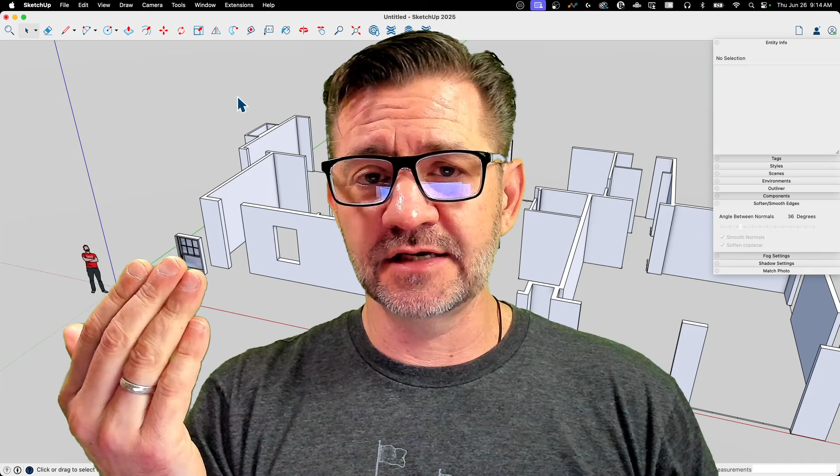So we did a couple of videos talking about taking line work and importing it, making the faces, and then different ways you can take those faces and make them into 3D shapes, 3D walls. And then the next step generally is going in and adding doors and windows. We're not going to focus so much on creating the door and window component. I'm going to work with the pre-made component for a window, and doors, well, we'll talk about doors too. Doors are kind of like windows that go all the way to the floor.

But I do want to talk about different ways to put those openings in and how you could go about them. A lot of it comes down to how you created the walls. So we'll talk about that, and then we'll look at different ways to get those in there. So let's hop in.

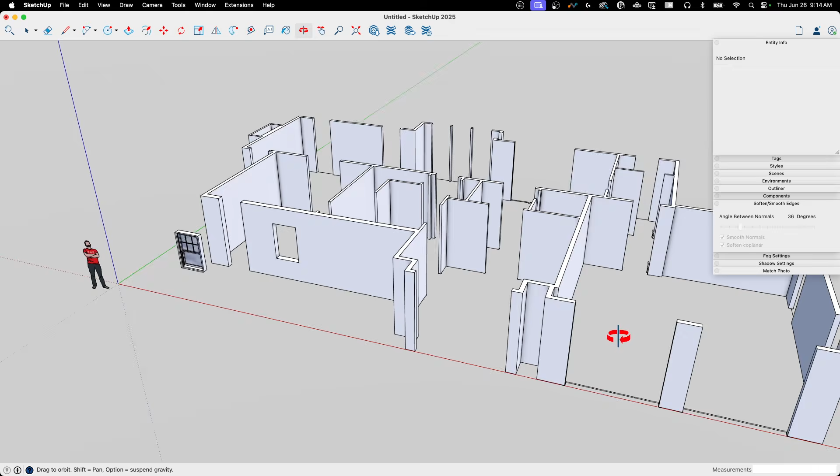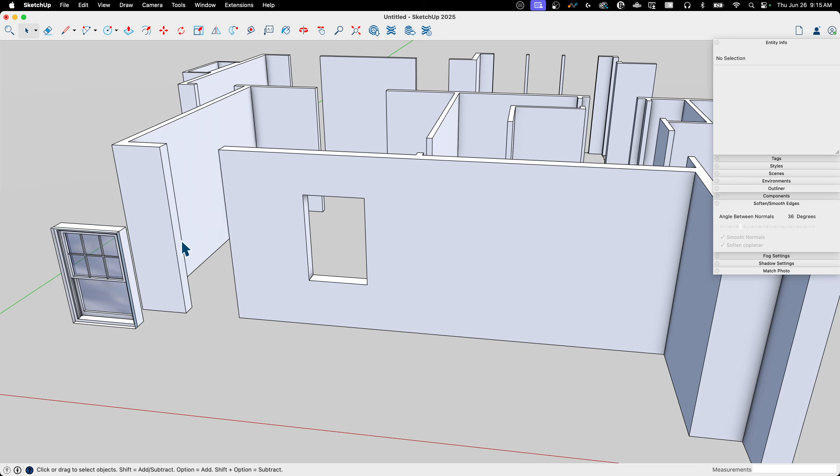All right. So I'm working off of this same house that I started on back in the very beginning of this series. And here I basically want to put this same window in this wall 3 times. Once here, once here, once here. These are the 3 different ways your walls may end up as you're working through your input. This is probably the most common. If you're drawing your walls and pulling up to 3D like we showed in the previous videos, you'll probably end up with a gap like this. If you're pulling along, you'll probably end up with a gap like this.

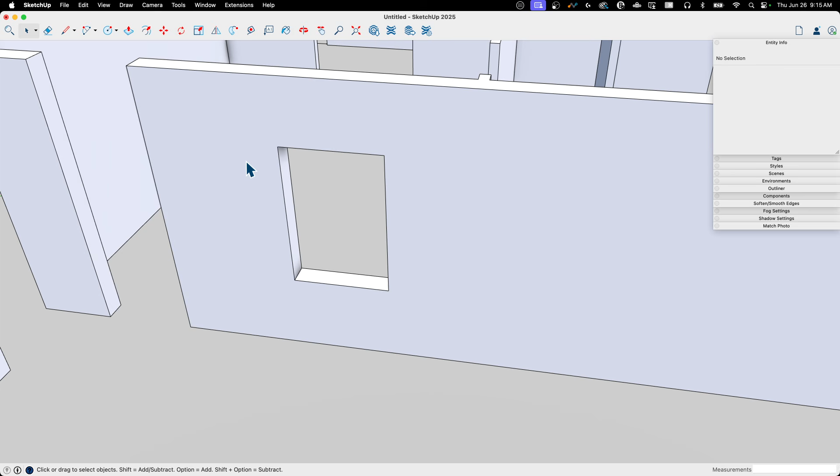There's a possibility that as you're drawing in your walls, you take the extra steps to break actual openings in. So you could have this at this point, which is kind of like, okay, you're done. But we'll talk about how to handle this. And the other option, again depending on how you're doing your input, you may just pull your wall all the way across an opening, which means you end up with something like this, and then have to go in and create that opening. So what do you do in that case? Let's take a look at these different situations.

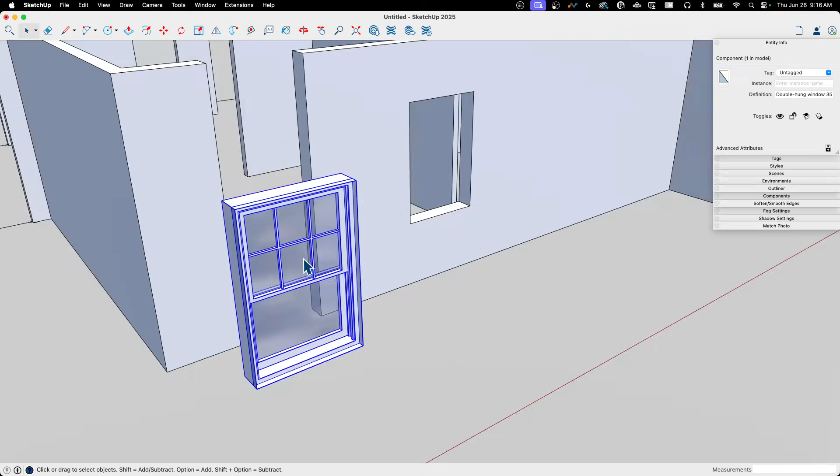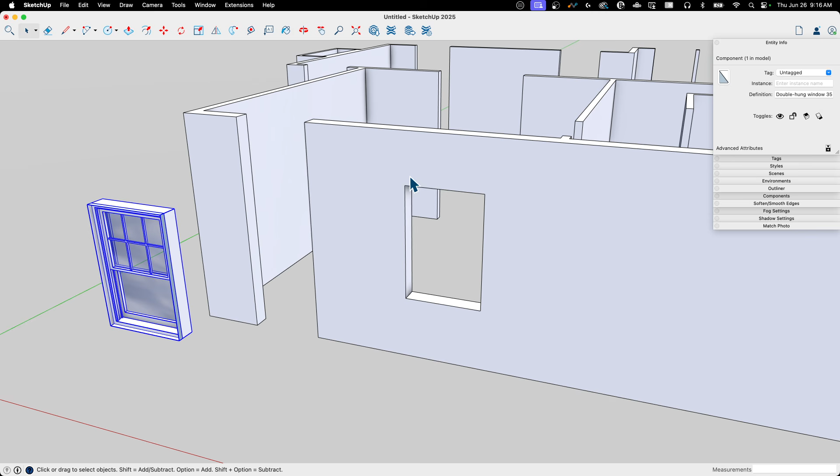Like I said, I'm just going to work with this window right here. So I have a component. I'm going to put this same exact component in multiple times. So just to jump to number 2, if as I'm inputting my walls, I actually put a face down, extrude it up to the sill plate height, put an opening, and fill the wall in up here where the header's going to go, then I'm fairly well done.

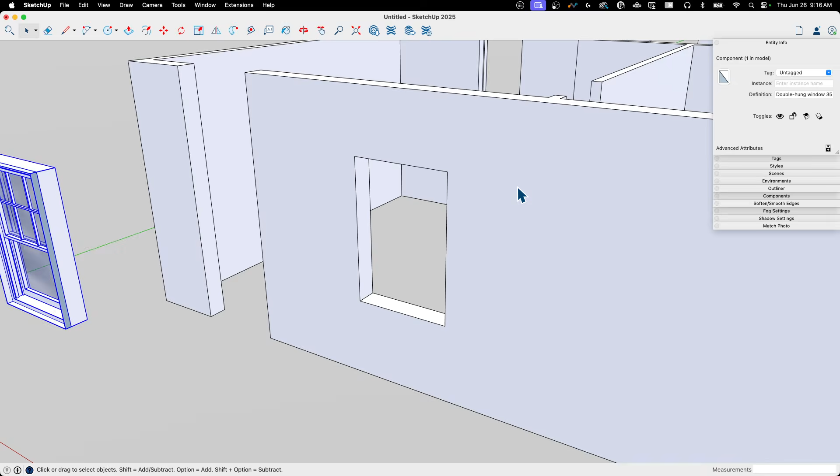The thing to remember, regardless of what method we use here, is what is the actual opening height that I'm considering. And I point this out for a couple of reasons. This is very similar to what I talked about when we talked about how you're going to draw the walls. The opening size you actually use is going to change depending on what you're using the model for. Just like anything else in SketchUp, this is a purpose-built model.

Meaning, is this opening going to be the exact size of the opening that's called out on your plan? Is it going to be based on the actual size of the component? Am I going to have additional opening size there, considering this is the hole in the framing versus finish? All of that is something you need to consider as you model. I can't tell you exactly what size opening you need to put in for a 3040 window. That is something you need to know.

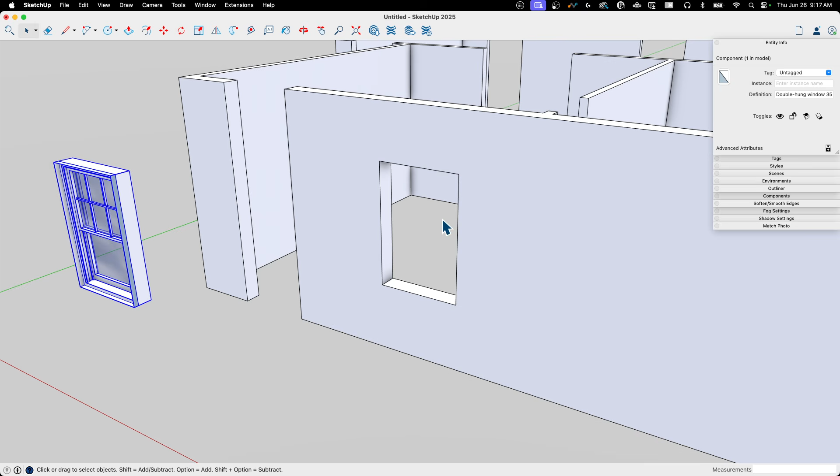In this case, I'm going to make my opening exactly the size of this window right here. So let's check it out. This is 3 foot by 4'6". And if I grab this window right here, it's going to plop right in there. And there we go. I'm done.

I'm good. You'll notice right now I am working off raw geometry. That is intentional, just so I don't have to hop in and out of stuff. Like I said in the other videos, I would of course keep this all grouped as I go. I'm just doing it loose because it's going to speed up this process. So if as I was modeling, I took that into consideration and left the proper opening size, then I can just come along, drop my components into those holes and be done.

The most common thing is this right here. This is where I have just a break in the wall. The wall stops, a door or window shows up here, and then the wall picks up on the other side.

Again, make sure that this width is the width you want. So we're looking for a 3 foot by 4'6" opening. This is 3 feet gap. That's perfect. Now I just have to put my 4'6" in.

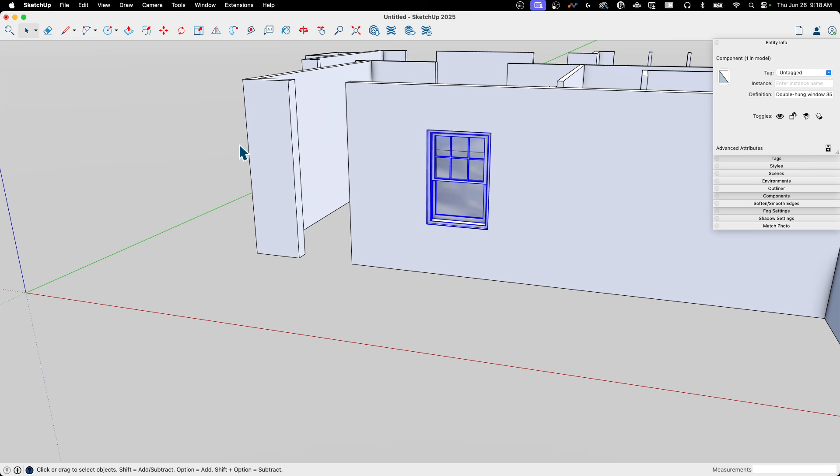Generally speaking, when you go to put in a series of doors, windows, whatever, a lot of them will have very similar measurements. They might be different widths as I work across, but on the front of a building, I'm probably going to have a consistent header height. Same with interiors. Probably most of my doors on the inside have the same header height.

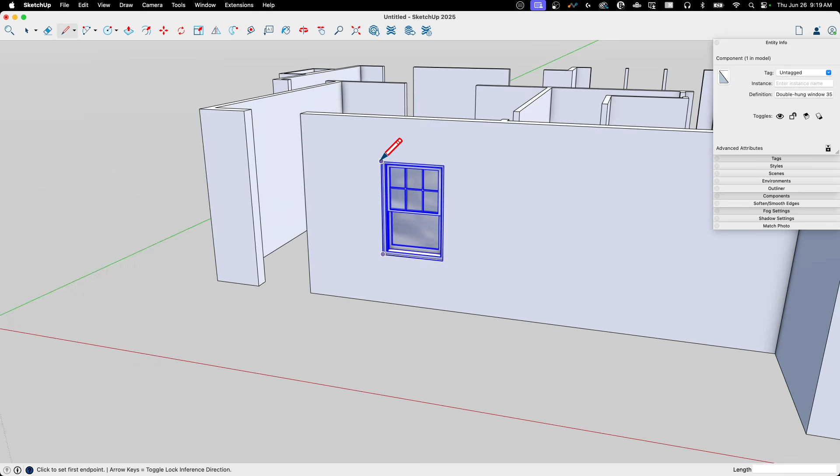One thing I recommend is getting an inferencing point to reference off of. In this case, the top of this header is a perfect example. I could come over somewhere off to the side and draw a vertical line in at whatever that height is. The reason I do this is it makes it real easy to inference off of that, then come over here and put a line across to break for that header right there. See how quick and easy that was?

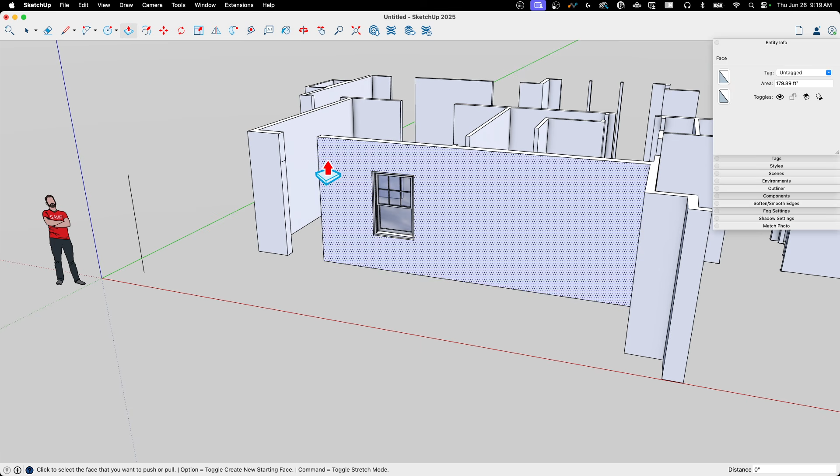We've talked in the past about doing things like planes you can inference, or invisible surfaces, and that's all cool, but it's easier to just do this. Here's an interior door right here. Same thing, I can just inference there, come over here, draw across like that, and I got that height quick. So it's your call on how you want to actually do this.

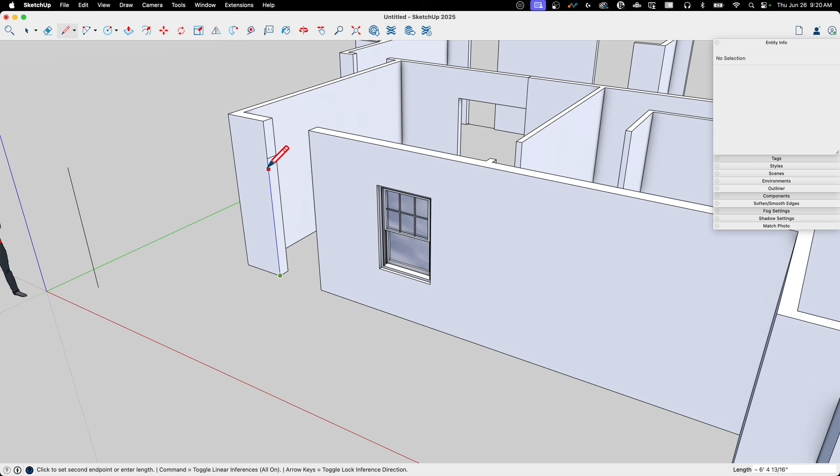Because what you could do is come up here and say, okay, I want to come up 7 foot and then draw that bottom line. However you get it, you just got to have a line there that breaks that, pull it across, and then to get rid of these extra edges, there's 3 extra edges, you could come in with erase, erase, spin around, erase, or you just do a quick select like this, group select.

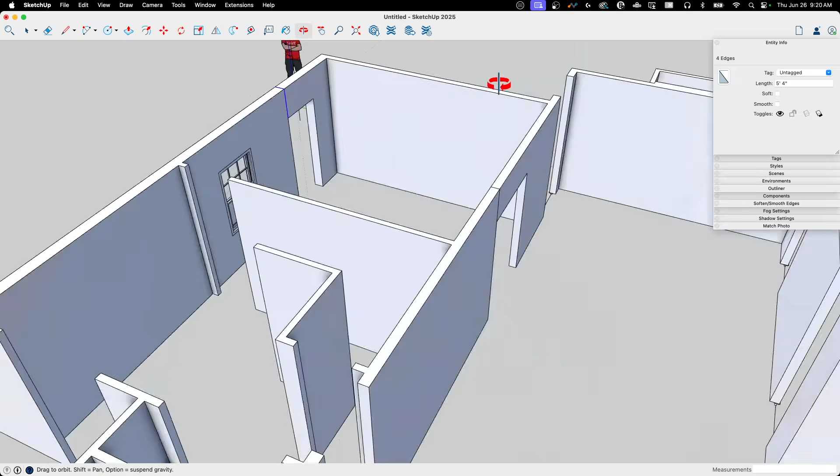That's too many. You don't actually want to do that. Don't do that, for heaven's sakes. The problem with doing a group select like that is it means I got this one right here too, so I'd have to deselect that, and that wouldn't be quite as quick or easy to get rid of.

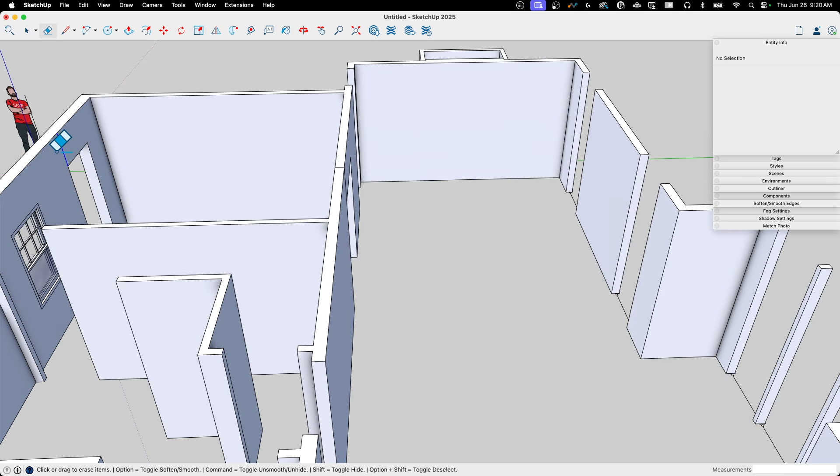So maybe, I thought I had a tip there, but maybe just regular erasing is the quickest and easiest. What you can do is put all your door and window openings in and then come along at one time and delete them, or use something like cleanup to join faces. That'll get rid of a lot of those edges, that sort of thing.

So if I am drawing a door, my opening is done at that point and I can go grab my component and drop it in. If I'm drawing a window, I've got to bring the bottom up.

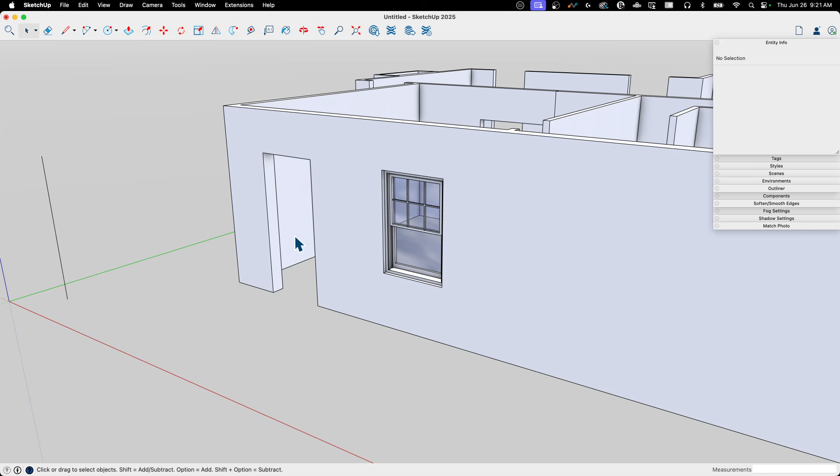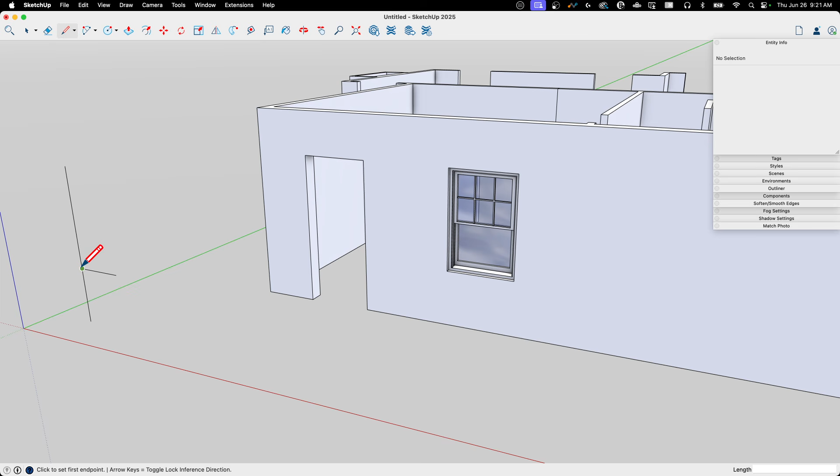This is something I can do very similar because I could come up here and create a reference. Here's whatever height that is, that ended up as a weird height there. But whatever that height is, I could draw an edge across like that. Then same thing, I can come here, inference up to this point, come across here, draw that across, and so I could do something like that too.

Same process, basically. The bottom, generally, again I'm talking in generalities, folks, the top is probably going to be very similar across the model, where the bottom might step a little bit more frequently than the top.

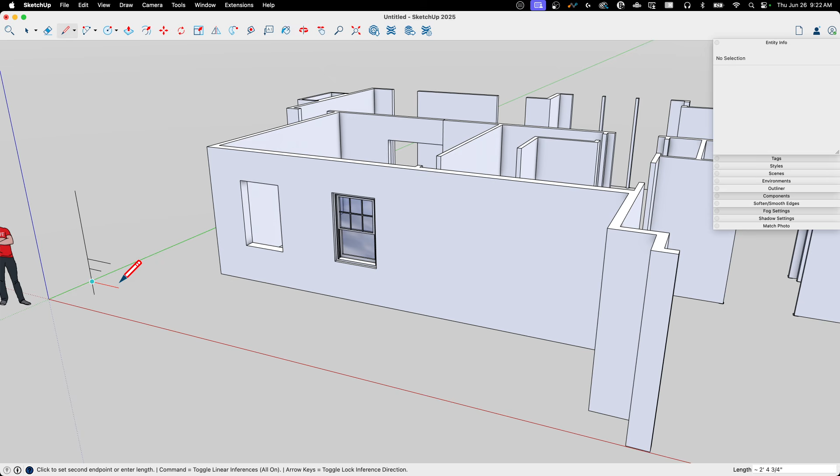So you might have something where you have multiple heights over on the side like this, where I can just inference them real quickly. The other thing, of course, is if I know exactly how big this opening is, I could always come here, drop down that height, and go across. Either way, that's going to get me the opening I want, and then I can pull that across like that.

The other possibility, like I said, this is the most common right there. And you can see that really, if I have some good inferencing, I'm going to draw another line across here just so I don't lose that snap point. If I have the right things to inference to, that can go pretty quick to close that up.

Now, when it comes to what about when I have nothing and I need to put that in, there's a couple ways you can go about this.

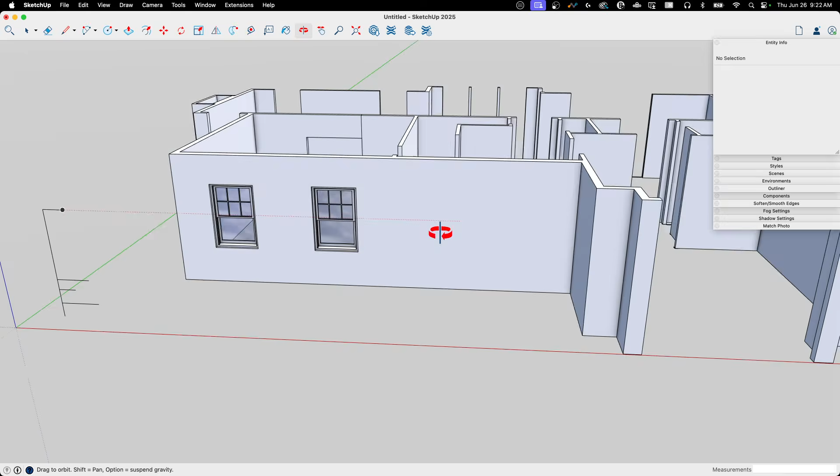So if I have an opening that repeats, say I want this twice, I want it once here, I would probably draw the shape onto the wall. Same thing, maybe inference right here. That's not going to work actually in this case.

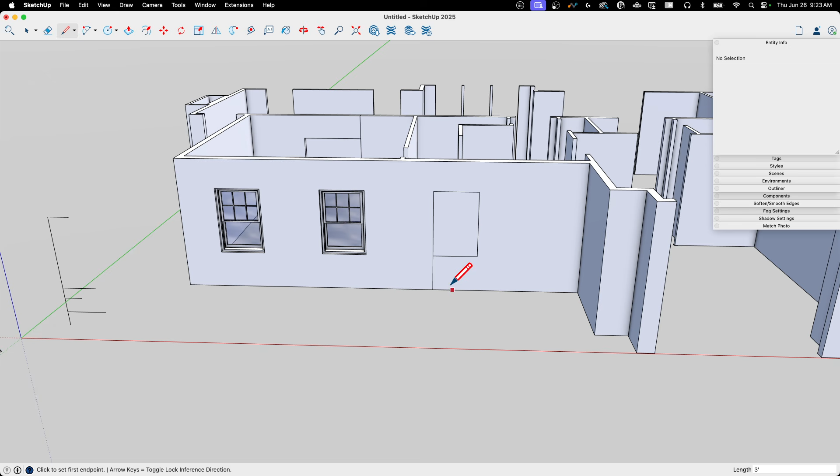So what I'd probably do, if I just knew there was a 3 by 4.5 window here, here's what I would do. I'd pick a point, come up to whatever my header height is. I can inference off my reference point, or I could type in 7 foot, then draw my line over 3 foot.

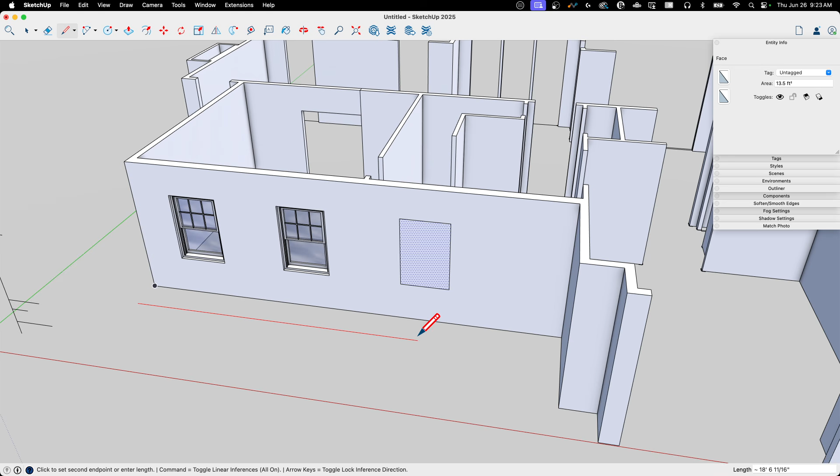Down 4'6", back over here, and then I have this rectangle. Now what I could do is find whatever point I have, if I have my plan on the floor I can reference that. The other option would be to come in here and draw a quick line, or grab the tape measure to figure out maybe the center of that is at 18 feet, so I could go 18 foot and move that from the center to that point.

And then if I knew my next one was 4 feet over, I could copy that 4 foot. The point is keeping this simple geometry and using that to mark out where the holes will be first is a great way to do it.

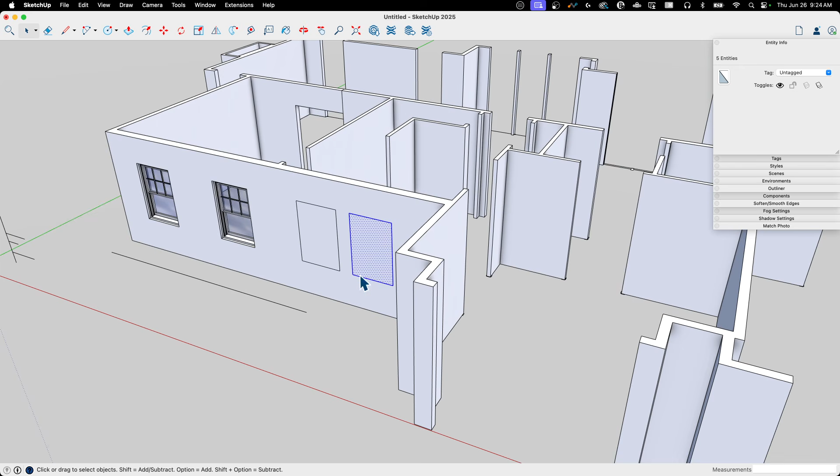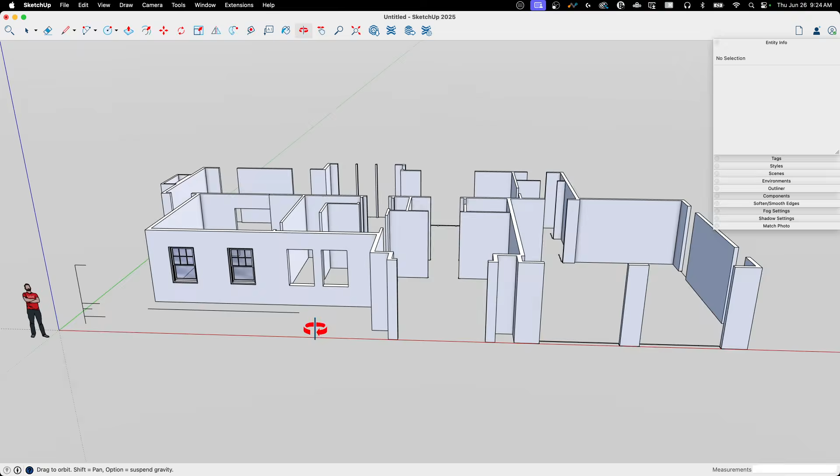In fact, I've actually done this where I have the same window over in a wall over here. So I will copy it, paste it, and bring it over here and put it in this wall. Then I can do a quick vertical adjustment to that same height and figure out exactly where it goes. Once I'm done with that, I can pull that through, snap to the backside, double click, and then I have that opening in.

This is doing all of this without any kind of extensions. There are extensions out there that allow you to use the window as a cutter or project openings through multiple pieces. This is all based on my walls being a single big group and not having loose geometry - my sheathing isn't separate from my framing, that kind of thing. So if you're in those situations, you may have more to consider than just this. But this is with just simple framing shapes, punching holes in there repetitively to get those openings in.

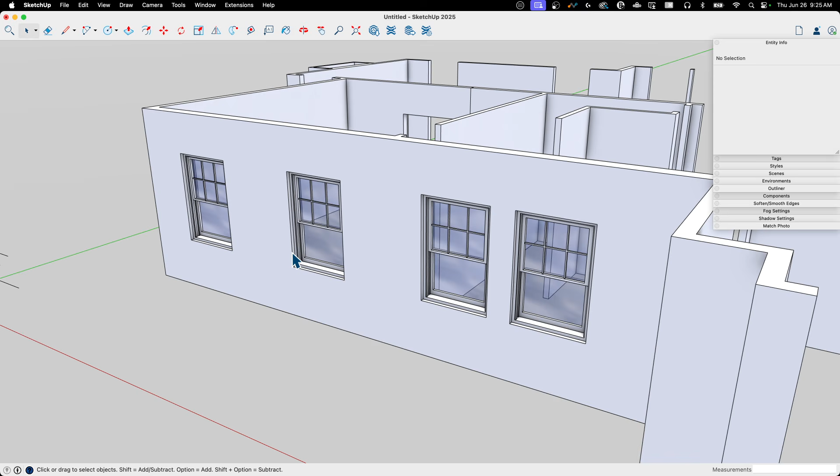And again, doors - I didn't do doors because doors are less work, you just don't do that bottom section. But yeah, pretty simple, quick, native commands to put all that information in there. Hopefully that all makes sense, and hopefully that makes it easy to put doors and windows into your walls.

So again, just to call that out, there are some assumptions here. If you're working off of things where I have a componented wall, with framing on the inside, sheathing on the outside, drywall on the inside, all those extra pieces, then you might have to look at something like an extension that will punch a hole through all those things at once. Generally speaking, I think most people at this point will just work off of that mass of the wall.

So again, that mass could be an individual wall, a set of exterior walls, or a set of walls of a specific width. However you break it up or group it out, just group it, no ins or outs. That's going to let you - the easiest, cleanest way is just going to be punch a hole in those. And that's a couple of options for doing it.

I know that was a lot of options. This is a part where, if you watch me, I struggle - there's so many ways to do this stuff. A lot of it comes down to what information do you need, what are you trying to get out of it, and what's the quickest or most efficient workflow for you. So there's a couple of options - check those out, think about those.